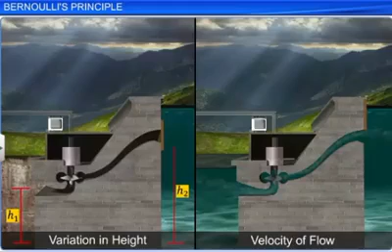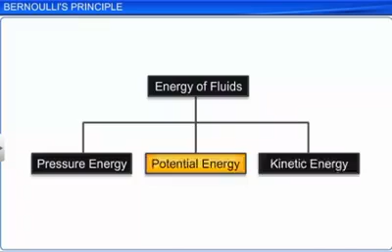All fluids possess energy. This energy is due to variation in the height of a fluid from a reference level and the velocity of flow. There are three types of energy associated with an element of fluid in motion: pressure energy, potential energy, and kinetic energy. According to the law of conservation of energy, as the total energy is conserved, the three forms of energy possessed by a liquid are interconvertible.

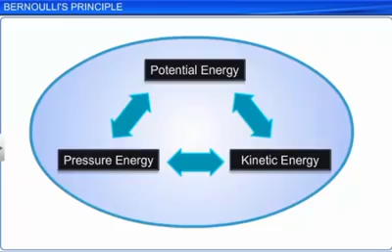Bernoulli's equation, developed by Swiss physicist Daniel Bernoulli, relates all these three energies. Bernoulli's principle states that for a streamlined flow of an ideal liquid, the total energy per unit mass remains constant at every cross-section throughout the flow.

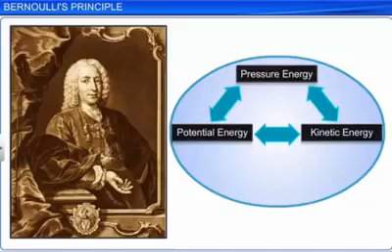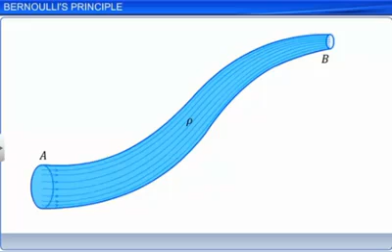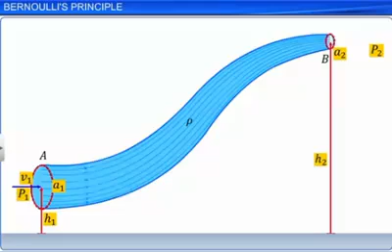Consider an ideal liquid of density ρ flowing steadily through a tapering pipe from its wide end A to its narrow end B. Let H1 and H2 be the height of ends A and B from ground level. Let P1 be the pressure on the liquid, A1 be the area of cross-section, and V1 be the velocity of the liquid at end A. Let P2 be the pressure on the liquid, A2 be the area of cross-section, and V2 be the velocity of the liquid at end B.

According to the equation of continuity, the total mass of the liquid going into the tube through any cross-section should be equal to the total mass coming out of the same tube from any other cross-section at the same time. If m is the mass of the liquid element crossing per second through any section of the tube, then A1V1 is equal to A2V2, which is equal to the volume of the liquid V flowing per second. This can be expressed as the ratio of mass m to density ρ of the liquid. Let this be equation 1.

Since the time considered is 1 second, V1 and V2 are the length of the liquid element of mass m at ends A and B respectively. Thus, A1V1 and A2V2 represent the volume V of the liquid element at ends A and B respectively.

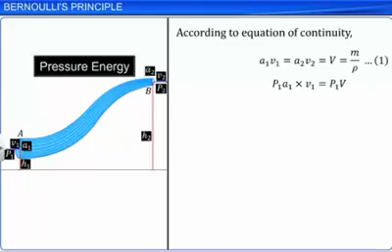Thus, the work done per second on the liquid element against the force due to pressure at A, which is referred to as pressure energy, is given by P1A1 into V1 is equal to P1V. Let this be equation 2. Similarly, the work done per second on the liquid element against the force due to pressure at B is expressed as P2A2 into V2 is equal to P2V. Let this be equation 3.

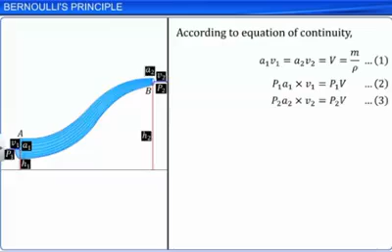The difference in the work done on the liquid element in moving from A to B is expressed as P1V minus P2V. Let this be equation 4. This difference in the work done is equal to the total change in the mechanical energy of the element. A part of the change in the mechanical energy is used to increase the potential energy of the liquid element and the remainder to increase its kinetic energy.

As the liquid element moves from A to B, the velocity of the element increases from V1 to V2 and the height increases from H1 to H2. Thus, the increase in potential energy of the fluid element per second from A to B is expressed as mgh2 minus mgh1. Let this be equation 5. The increase in kinetic energy per second from A to B is expressed as half mv2 square minus half mv1 square. Let this be equation 6.

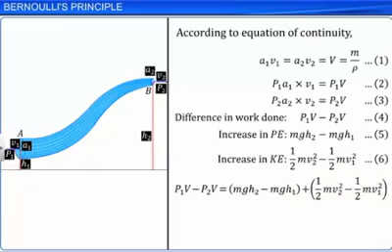According to the work energy theorem, work done is the sum of the increase in potential energy and the increase in kinetic energy. Substituting and rearranging the terms, we get the equation as shown. Dividing this equation by m, we get equation 8 as shown.

As the ratio of mass m to volume v is equal to density ρ, the equation now becomes P1 by ρ plus GH1 plus half V1 square is equal to P2 by ρ plus GH2 plus half V2 square. This relationship holds good at any point in a streamlined flow. Thus, we can say P by ρ plus GH plus half V square is constant across all points in a streamlined flow.

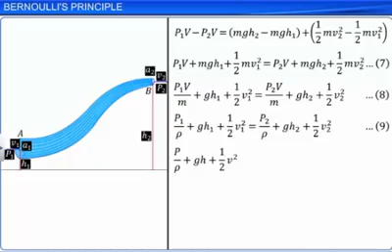Therefore, the total energy of the fluid, which is the sum of the pressure energy per unit mass, potential energy per unit mass, and kinetic energy per unit mass, remains constant or is conserved across all cross-sections in a streamlined flow. This proves that Bernoulli's principle holds good for all ideal liquids in a streamlined flow.

We can also represent this equation as P plus ρGH plus half ρV square is a constant. Thus, in a streamlined flow of an ideal liquid, the sum of the pressure energy per unit volume, potential energy per unit volume, and kinetic energy per unit volume is always a constant at all cross-sections of the liquid.

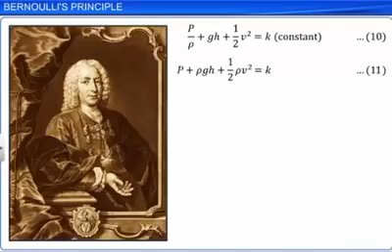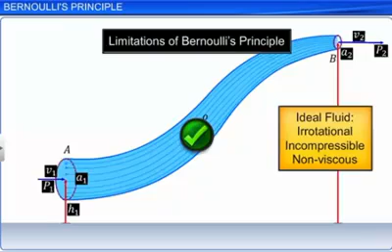Bernoulli's principle, however, has some limitations. It is applicable only to ideal fluids, that is, irrotational, incompressible, and non-viscous fluids in a streamlined flow. If a fluid is compressible, as is generally the case with gases, volumes do not remain constant, and hence density does not remain constant. Thus, we cannot apply Bernoulli's principle to situations such as this.

When the liquid is in motion, the viscous drag of the liquid comes into play, which has not been considered while deriving the expression. Some part of the kinetic energy is converted into heat, but it is assumed that there is no loss of kinetic energy.